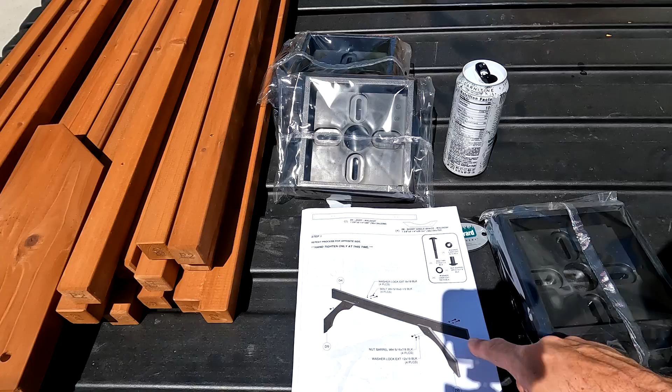So step one of the assembly is D4 and D9s, you're going to repeat this 2 times. Then the next step, I'm just going to do these all at the same time, D1s and D8s, so that's the longer and shorter sweeps. Again, these are all labeled on the ends, so I've got them D1, D2, D4, D5, D8, D9 all separated to make it easier for me.

It's not super hot here today. It's nice and sunny, probably 75, maybe 80 degrees. Don't put your bolts in the sun, they're black, coated with like a plastic coat, they get super hot. So I've rearranged my bolts and I'm going to put something over top of them to keep them cool.

So I've got my first bolts ready over here in the shade. I went ahead and put the washers on top of them so I can just put them together. It says do not tighten them, so I'm just going to loosely assemble it right now and tighten it up whenever the instructions tell me to.

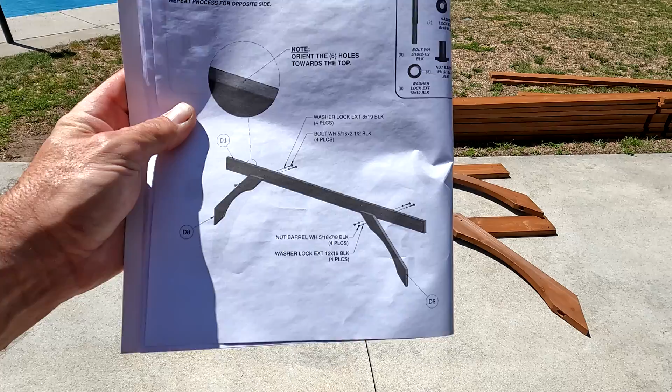So you can see out in the yard, that's my first 2 pieces. My next step will be step 2, which is basically the same thing over again. It's D1 with the D8, so it's the longer boards. I'm going to put those together and we'll go to the next step.

Alright, so I'm putting these together now. Whoa, bleep that out.

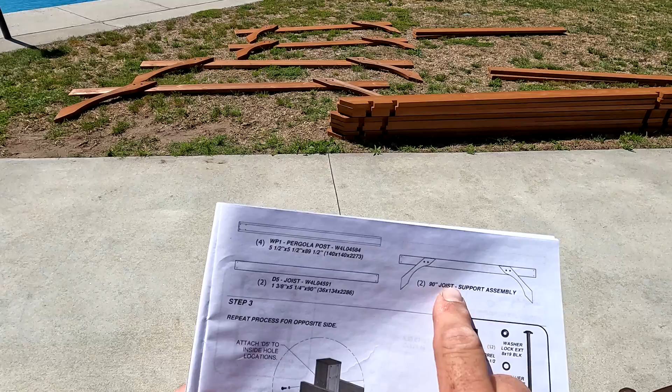So the next step is to take our joist supports that we just built. We're going to take our 90-inch ones first, and then in the next step we're going to take the longer 114-inch ones. This is going to be sort of like what we just did.

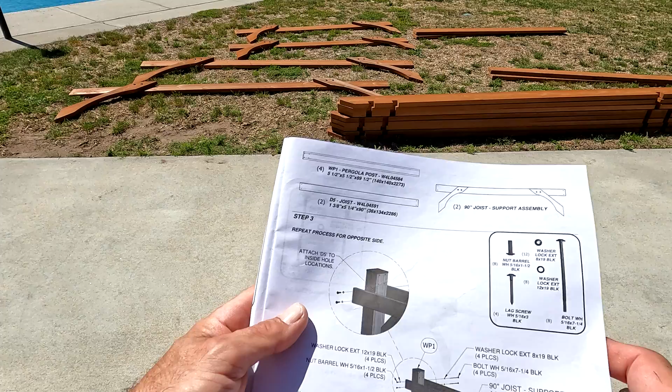We're going to just repeat on both sides. So we're going to take our posts, lay our joist assembly inside, put the D5 across it, and bolt them together with the bolts that it says.

So I've got it laid out here. I haven't got it bolted together yet, but I'm not going to make you watch me bolt it together. It's pretty simple: stick the bolts through, put the nuts on. A screw goes through the side to hold this together.

So I'm going to put all 4 of these together, so I'll have 4 pieces ready to stand up, and then I guess we're going to stand them up, and bolt them together with the longer pieces to hold them in place. So I've got the first one fit together.

I'm going to go ahead and tighten these bolts up so I can put the lag through this. Again, this piece is still loose, which we want. Make sure you use your square, and you want to square up these poles before you tighten them.

It's hard to do this with a camera, but I'm going to take my square, put it on the edge, and turn it so I've got a nice straight line across there. I'm going to tighten my bolts up. Make sure you square these up. If not, it's going to be lopsided and not look good.

One more tip while I'm doing this: I'm pretty much doing this by myself. I've got a little help lifting things here and there, but before I put these together, if you lift up, put the bolt through like so, then you'll be able to just set your post right on top of it. So I've got these 2 pieces here ready to go, the 2 arches.

I'm going to take one of these arches and pull it out this way. I'm going to lean the other one up against the house. It's a little breezy today, so I'm going to have my wife help me hold it up. And I'm going to take the other 2 joists and bolt them in place.

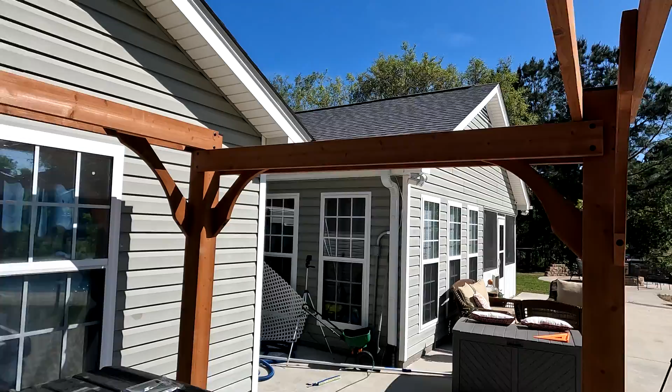I've got it pushed back to where I want to keep it, and I've got the supports on both sides, so I've got a big open square now. We're ready to move on to the next step.

So the next thing is to do the in-joist pieces. I haven't screwed those down yet. It says 15 and 7/16 spacing, so I just went ahead and laid them out and got them in place. Got my impact and my lag bolts, and I'm going to shoot those into the top.

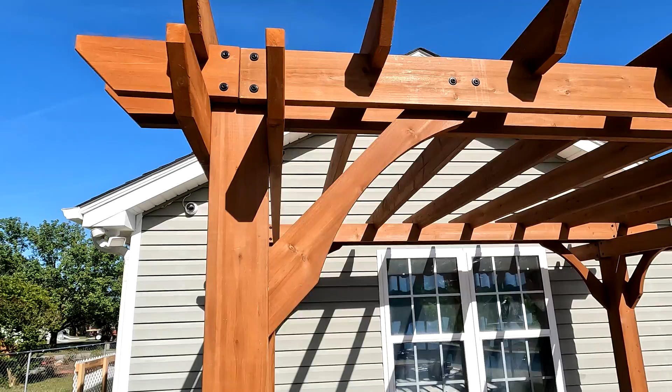So far I've had really no issues putting this together. The only thing is I got one piece of wood here that was pretty dry, and when I went to tighten the bolts it collapsed in. I'm going to just send them an email and they'll probably send me another piece. I could probably flip it to the inside and no one would ever see it, but it's a really brittle piece compared to the rest, so I'll just have them send me another one.

Alright, so all those are attached now. Spacing worked out almost perfectly. I had to move one just a little bit, but for the most part it worked out perfect.

So the next thing is the P1 and P2s, which are just our cross beams. Now if you're going to cover this up, you could probably put a plastic or metal roof on top of it. I don't think I'd put those extra beams on it because the roofing will hold it in place, but that's up to you. If you're going to leave it open like I'm going to, I'm going to use the P1s and P2s.

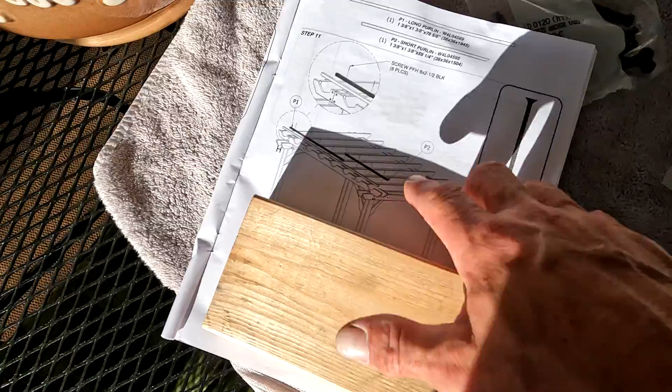For this part, since there's so many of these to cut, I made a little cheater block. I took a 2x4 I had and made it 7 and 11/16, and I'll just lay this in between the slots. So every time I put one up there, I can put this in, screw it down, slide it over, screw it down, working my way across. Should save me a ton of time trying to measure every single beam.

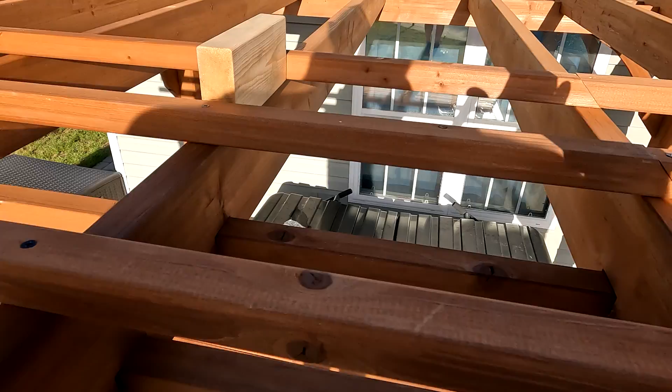So basically just take your block and lay it in there for spacing. When you put the next row up, put it up there, screw it in the middle, and then work your way out, placing your block each section. That keeps you from having to measure every single time you're putting these across.

So there's my finished result. About 6 hours worth of work, one person, with 2 people at a couple points just to help lift and hold things together while putting it together. But overall, pretty happy with the construction, or with the kit.

Again, there's that one piece I'm going to see if they'll send me a replacement for. A couple of the slots up top, or the sides up top, I had to re-drill the holes for. Most likely it was probably a slight warp in the beams going across, not necessarily the pre-drilled holes at the top. They're only off a quarter inch, half inch, just enough to barely miss the wood, so I just re-drilled those, but there weren't many of them. If you're a framer, you'd probably take the time to bow those together, but for what I'm doing out here, it's not going to matter that much.

I haven't put the feet on it yet. I know they make steel ones, and since I'm going to put this on the concrete, and we're not sure whether we're going to push it against the house or pull it out towards the middle to move the hot tub a little bit, I'm going to leave it like that for now. I'll get the metal feet and drop them in, then probably anchor it to the concrete once I'm done. It does come with some plastic feet, or you could put this in the ground or on the grass if you wanted. I would pour little pads if I was putting it out in my yard, just so it stays a little more stable.

It's not super heavy, you can move it if you wanted to. I can pick up one corner, so 2 or 3 men could easily move this thing around.